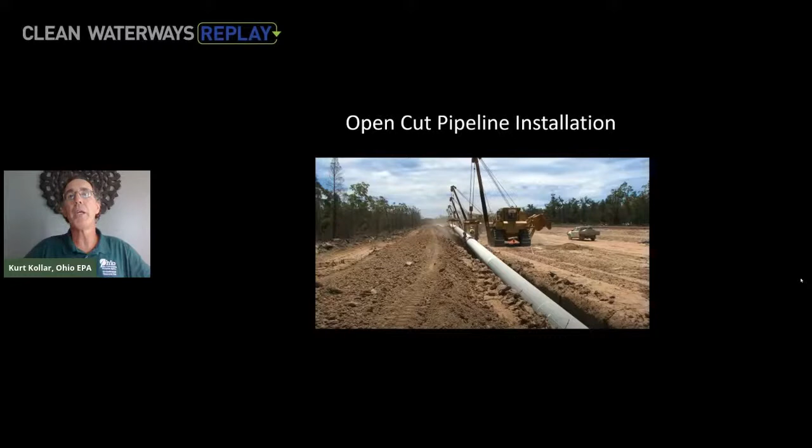What I want to talk about is pipeline installation. What you're seeing on the screen, not to bore everybody who's familiar with it, but not everybody is up to knowledge on how things go in. When they're laying pipelines, different utilities, different sizes, anywhere from sometimes a 6-inch pipeline all the way out to the big 36-inch, 42-inch, and 48-inch pipelines. Open cut is the preferred method. That is where you dig a trench, lower the pipe in, bury it, and things are good. Next.

They'll drill a pilot hole, maybe an 8-inch or 10-inch hole, and then they'll keep going back and forth, each time successively enlarging the hole using what's called a reamer bit. Now the process is fairly simple, fairly straightforward. Where the IRs come into play is during the course of cutting that borehole, drilling fluids—typically water with a bentonite slurry mixed into it—are pushed through the pipe to the cutting head, and then that material returns back to the surface where it is reclaimed and recycled. So that's how it goes. Go ahead, next slide.

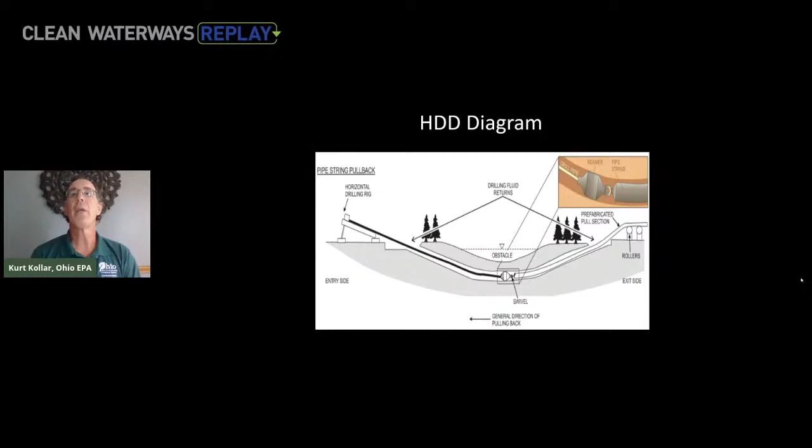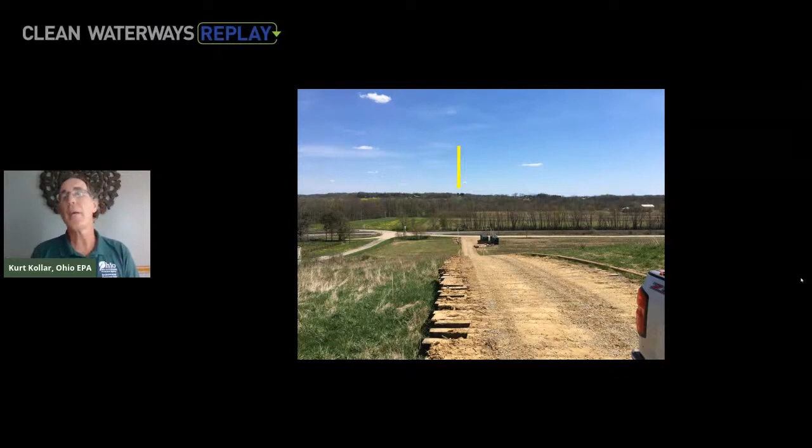When you're doing an HDD, as you can see the yellow area in this case, there's the distance. We're at the one end. The HDD in this case is traveling almost 5,000 feet to the output side, and they're avoiding 3 different obstacles in the one directional borehole. So sometimes they are expansive. Other times they just go underneath a 4-lane highway. Go ahead, next slide.

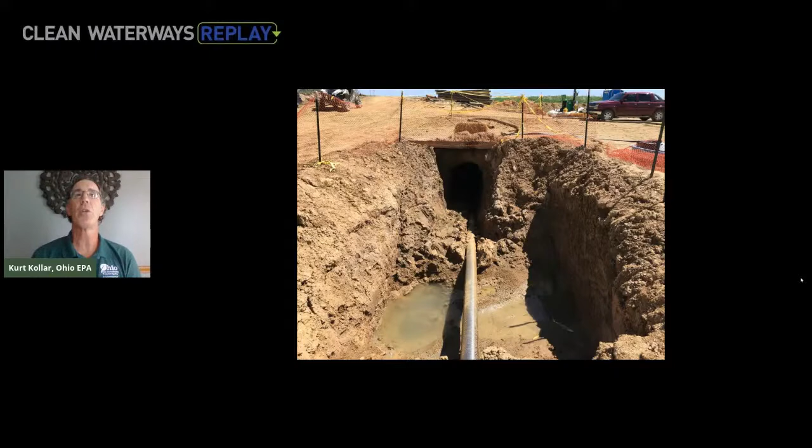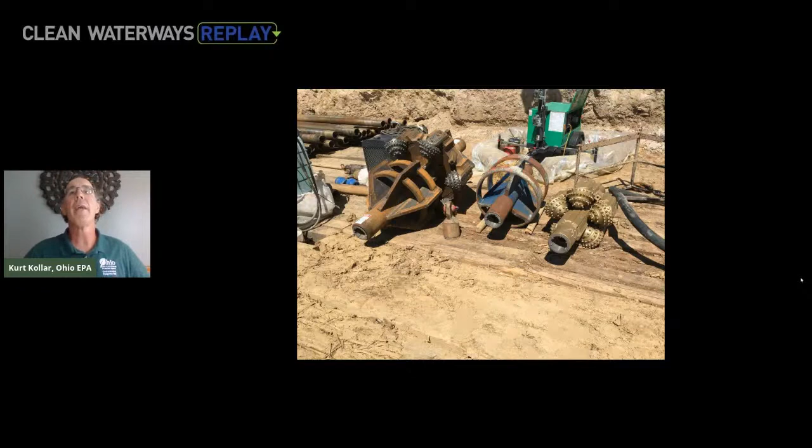These are just some examples of reamer bits, and by far these aren't the smallest ones. The one on the right is a 30-inch, all the way out to the 54, and they do get bigger than that. You're talking big equipment when you're doing this type of work.

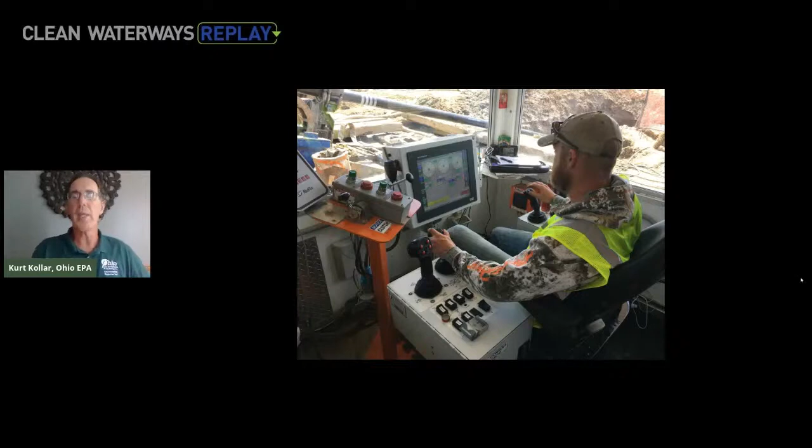This is the brains of the operation. All the work, this is the controller, simple joystick operation. They make it look easy, but it is a complicated task. When they're doing this type of work, they know exactly where they're at any time with the drill head and where they're going to be positioned in that borehole.

Now this is where you're starting to get into IRs. These are the different gauges that they're watching. But if you look at that middle gauge, the mud pressure, typically they could be operating in the range of 600 to 800 PSI when they're pushing mud through the pipe and then getting the return.

An IR, an inadvertent return, begins when that mud no longer is coming back to the open borehole. It could be being lost into formation, it could hit a void space, they could hit old mine shafts. Something goes on, but the first indicator is they will have a partial or complete loss in that mud pressure, and that is supposed to kick some of their contingency actions into place. I'll discuss that in greater detail down the road in this presentation.

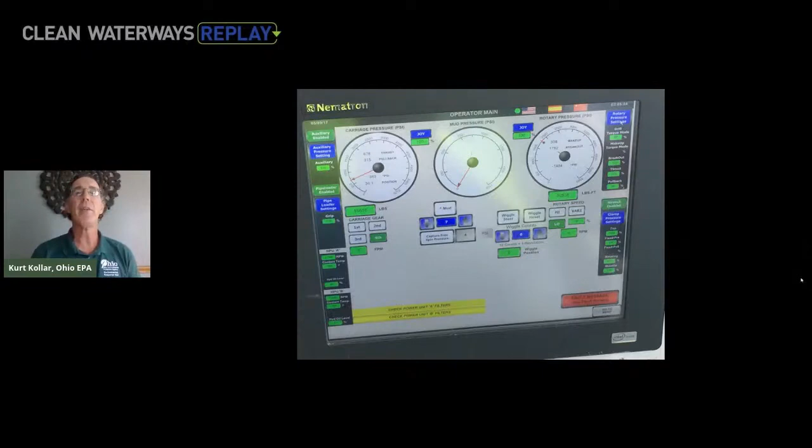One of the things they have to do is, as they're drilling the borehole, sometimes done in days, sometimes it takes weeks, even months, the pipeline that is going to be pulled through is already fabricated in place and just waiting to be connected and pulled through that borehole when it's all said and done.

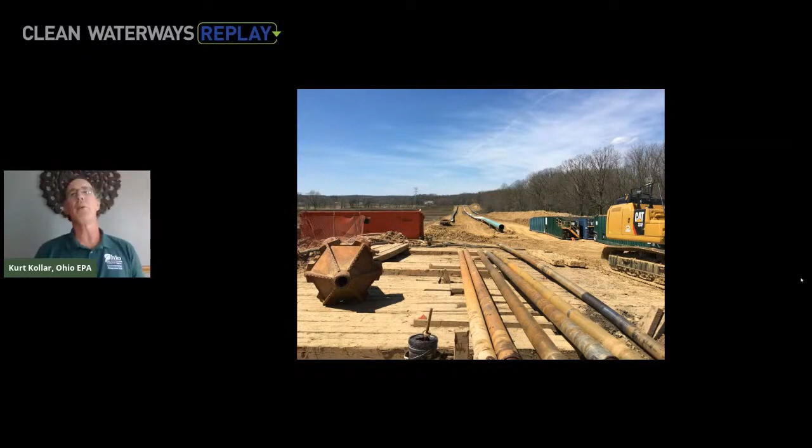So let's get into the brains, the basis of what we're here to talk about: inadvertent returns. An inadvertent return is, as I said, the mud used in the drilling process comes up somewhere where it wasn't supposed to happen.

In this picture, these are your common everyday IRs. The mud popped up in the wetland area, a small amount, 30 to 50 gallons, easily contained with hay bales, using either vac trucks or heavy duty pumps. They could collect that mud. Easily controlled, but yet still a problem, still something they didn't want to occur.

A lot of times what happens when they do get an IR, the indication at first is the loss of pressure. They start sending crews out to find out if they're having a release at some point in time. They will typically shut down the drilling operations, and that in itself gives it time. A lot of times the hole where the flow path is coming from will seal itself. If that doesn't happen, they can and will add additives to the drilling fluid to help plug it, sometimes fibers, other thickeners, just to plug the formation, whatever is causing that release, and move on.

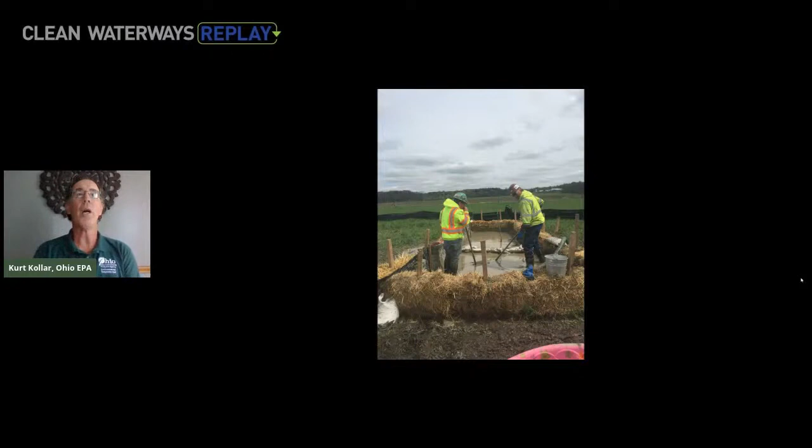Again, sometimes they can't control where the IR is going to occur. This time it's right in the creek bed itself, one of the obstacles they are trying to avoid. The indication, as you can see, is the mud coming up. The first indication might be muddy water along the bottom, and it might take a day or two before it's seen. That's where close observation is needed during this process, monitoring that mud pressure and seeing what's going on.

One of the things they found out over the course of time working with them is the breakouts tend to occur a little bit further off the center line, the drill pathway, in the beginning, and then, if it's a repeat IR on the same line, they tend to work their way in closer to the center point of the drill line. It's just something that happens as the formation fills with this mud, it's a preferential flow pathway.

What you see here is that release from the other side. Pretty simple, sandbag it out. They're prepared, dam off the creek, able to collect and control the mud. With a simple pump-around using trash pumps, the water was able to be diverted around the dam, and everything is pretty much status quo with very, very limited disruption.

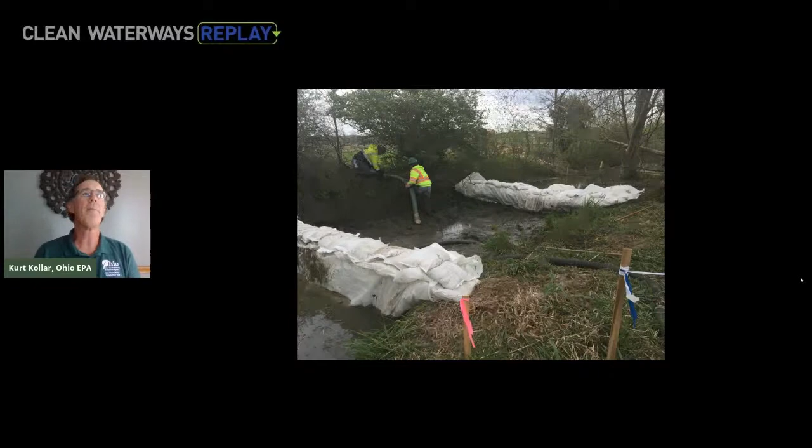Same thing here, IR occurred, hillside breakout, again very common. Go ahead and put up your hay bales, have an inventory of them on supply on hand when you're doing these types of projects, and it could be collected and contained relatively easily.

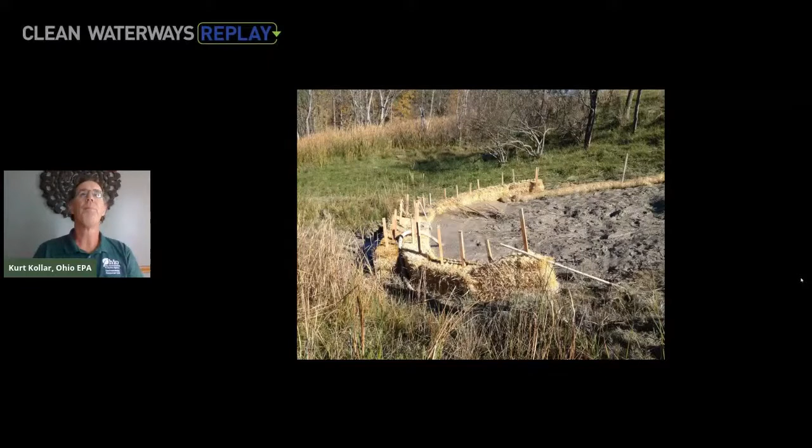Next slide. Example of one where the breakout was in a little bit more of a rapid flowing stream, again with the concept of water separation, the mud staying on the bottom, basically building an overflow dam using the hay bales and silt fence, able to control most of it. It's not always perfect, we just try to do our best to minimize the overall extent of impact to the waterway, with the anticipation this could be a short-term, small duration IR.

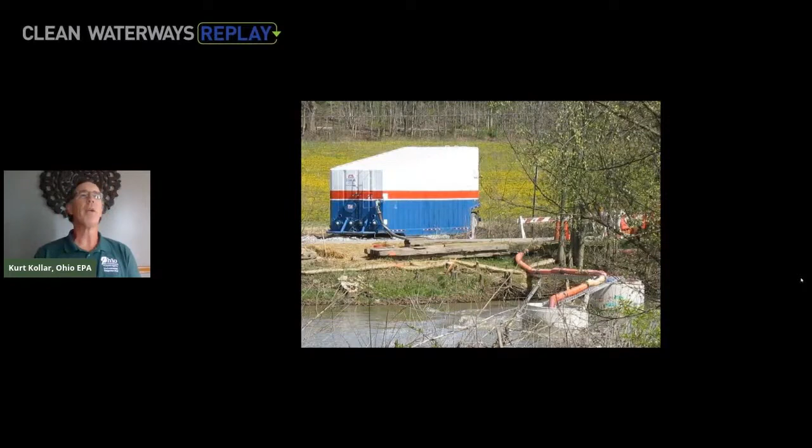This is, as I'm calling it for the presentation, the mother of inadvertent returns.

Ohio has had a tremendous growth in our natural gas production with the drilling formations. And one of the problems was, as they're putting these wells in, they didn't have the highway network to get the pipeline, the natural gas, to market. So we've seen a massive undertaking of work, different pipelines being installed across Ohio, interstate, going into other states to help transport that natural gas and other products to where the market needs them.

In this case, it was approximately a $4.2 billion, 713-mile dual, side-by-side, 42-inch natural gas pipeline being installed. And it's amazing that they transport that amount of gas, 3.25 billion cubic feet per day, from gas that came out of the wells here in Ohio.

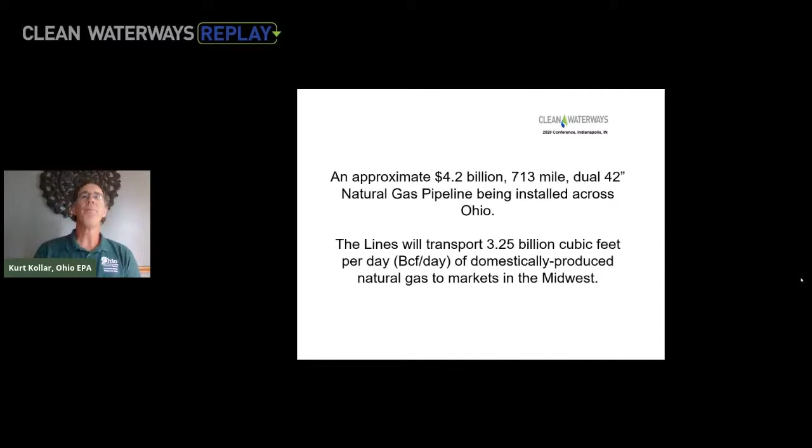Under the emergency response here in Ohio, we get notified. As I said earlier, one of us is on call 24/7, and on this particular day, I was the one on call. Calls come in from companies, fire departments, emergency management agencies, whoever would notify us that they need our help.

In this case, we got a notification from a drilling company of an inadvertent return down in the bottom of Stark County, still up here in Northeast Ohio, along the Tuscarawas River, basically telling us of an IR. At this point in time, IRs were almost a daily occurrence for us. There were 3 or 4 active pipelines going in, a lot of small-scale trunk lines, so nothing to get too worried about. Even with the initial notification, there was nothing outstanding on this one to make it any different, other than let's go out, get the vac truck, get the hay bales.

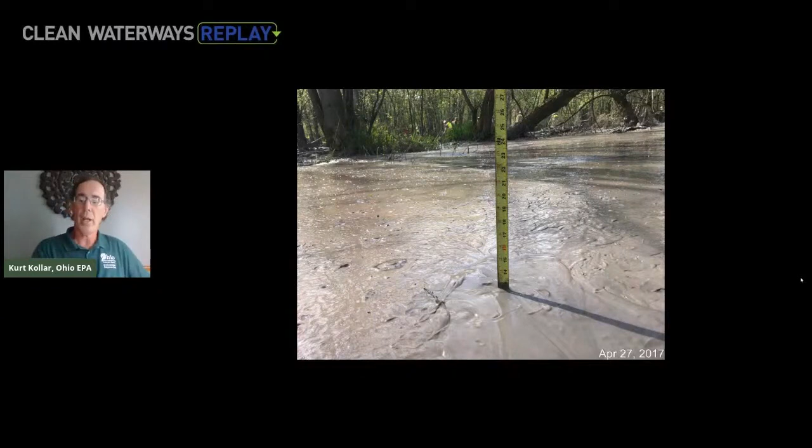When I was walking through this one, my mind became almost numb, working with it, looking at the other people. It's what are we going to even do to fix this one? And kind of to capture some of what I was seeing, the video, a picture's worth 1,000 words.

I'll be quiet for a moment and show you a video of what we were looking at when I arrived on scene. That's just mud. You remember the first picture, nice and green, the area. I was in the southeast corner. I was even in the thick of it. Now here is your mud.

And that kind of, I don't think that is what the wetland folks consider the hydric soils that they use to categorize wetlands and all that. Go ahead and go to this next slide.

Here we go. One of the things when you're looking at all that mud, now we're in an isolated area. The blue circle is the area where the IR occurred. And part of the process is it was a remote area. They were crossing from left to right.

During these processes, and I kind of touched on earlier, when an IR begins, when they lose pressure, they are supposed to implement their response procedure, contingency procedures. They're supposed to also do daily walkovers through the area, through the center line of the drill, just checking to make sure everything's going well.

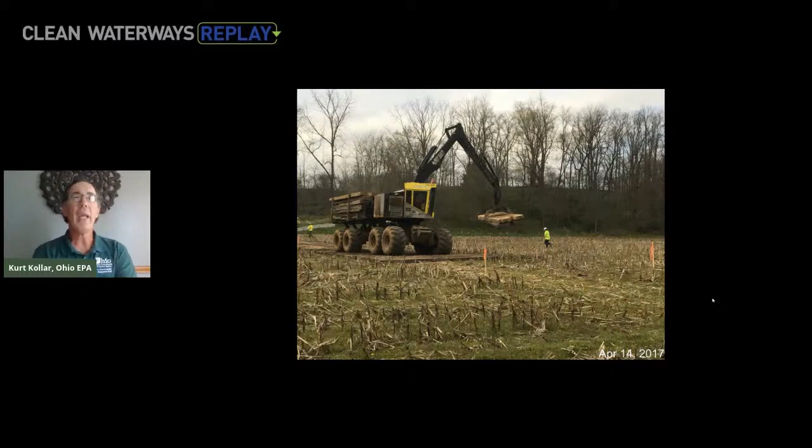And they built a road back to the area where the IR occurred so we could start with the cleanup. That took a couple days, even planning and construction. They knew they were in for the long haul.

Part of this process and the anticipation of this was they still had another whole pipeline to do, plus they had to continue this one. They were only about halfway through the borehole. They had to take a borehole for this one out to 60 inches. So they had a couple more passes and a lot of mud to push through the hole yet.

So they built a road with the anticipation of being in it for the long haul.

Now we were dealing with mud. One of the things we did, it was heavy labor, and my hat's off to the crews that worked. There was nothing easy about this cleanup, from moving sandbags and wattles to dragging hoses and vacs and all that, just pushing mud to pickup points.

One of the things we did right away is brought in emergency response, which has the ability to bring in subject matter experts from our other divisions to help us and provide guidance on what we need to do next - anything from waste management to air pollution to our division of surface water, our wetland biologists and specialists. We also notified U.S. Fish and Wildlife Service so they could have a say in this matter.

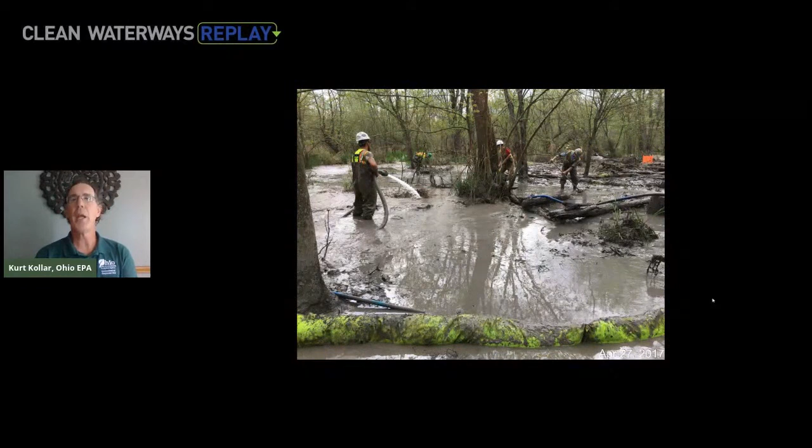Then, using vac trucks and high volume hydraulic pump heads, we moved the mud to collection points. The nice thing was the facility was able to reclaim a lot of this material, the water and mud needed for the HDD to continue. It was brought back up to the drill rig, put through the reclaimer to get out the solids, and the majority of it was reused. So we almost had a closed loop system going.

Again, my hat's off, there was nothing fun about it. There were slip, trip, and fall hazards left and right, and mosquitoes that wanted to carry you away - too bad they didn't take any of the mud with them. It was actually a joke among the crews: if you did a face plant in the mud, you had to buy your crew pizza dinner that night. Believe me, there were many pizzas bought for the different crews, and I won't admit to falling once or twice myself.

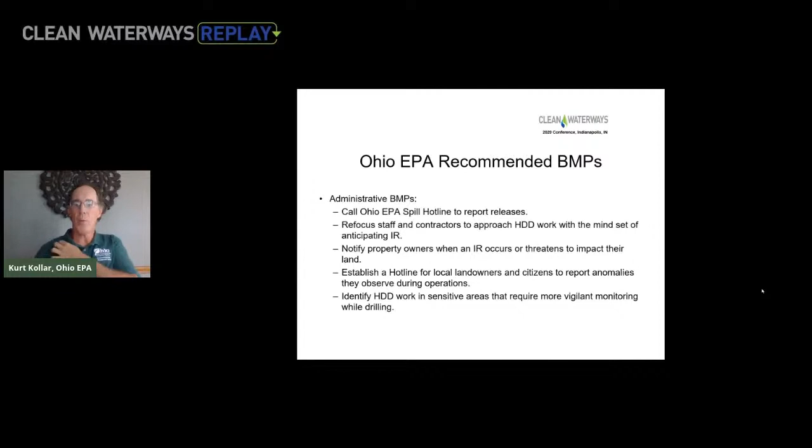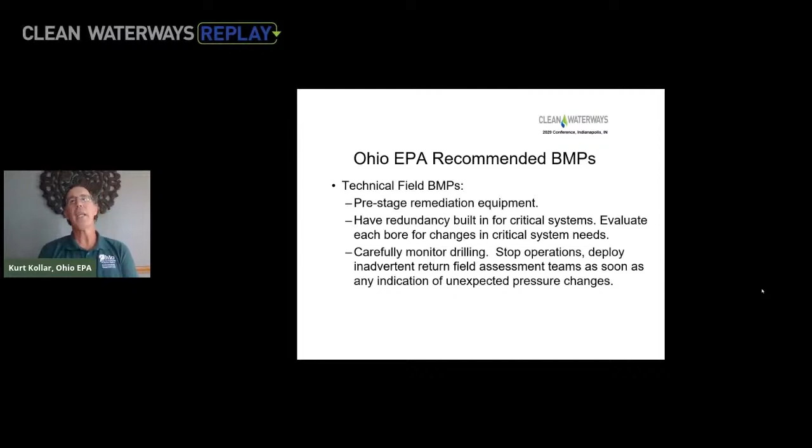The biggest thing is careful monitoring of the drilling, recognizing that time is money, yes, but if things happen and go bad, this cleanup was costly. It slowed down their operation.

The other thing is, and the company even talked on this, the distance underneath from below grade is calculated out well ahead of time. A simple shift of a foot or two is nothing, but if a 10-foot or more shift happens, a lot of engineering has to go into the angle of pitch.

And all that to get the pipeline to bend and flex in the borehole and come out at the right depth. On this one, they knew right away with the second one, were they going to relocate or go deeper? In the end, they went deeper by a significant amount without any issue. There wasn't one IR reported whatsoever during the installation of that second 42-inch pipeline.

So, I mean, mistakes happen. Is it a soft bog? What are the soil depths? They do sometimes do well borings to get that formation information, but sometimes those borings are miles apart, 5, 6, 10 miles.

The other thing we found out, a lot of these companies were even out of the West, Texas and all. Our geology, our winters are much different than what they faced in Texas. That was one of the things a lot of the companies commented on, is they weren't expecting some of the features and some of the weather conditions they had up here in good old beautiful sunny Ohio.

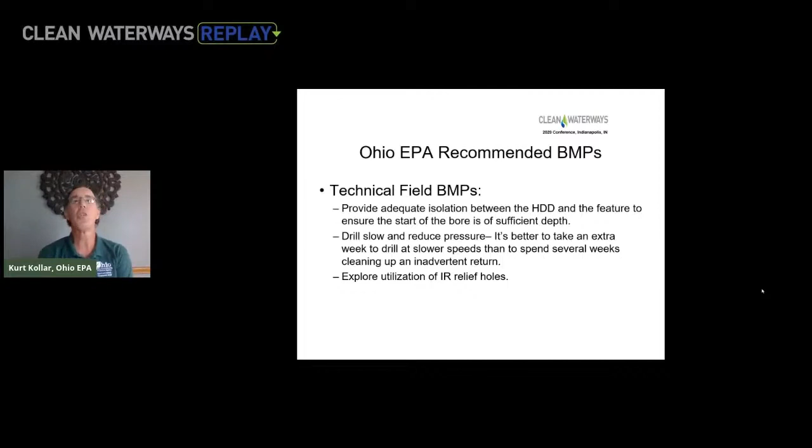It was evaluated whether or not they go ahead and drill a borehole from the surface down on top of the HDD, case it off, and give the mud a path to go. After some serious evaluation, they opted not to do that, but that is sometimes a very effective operation. Now you basically have a point source discharge for your drilling mud to come out of. So go ahead, next slide.

It was amazing too, and this isn't an isolated case. When you're talking to the crew in the field, they really don't even know sometimes what the identified resources they were targeting were. It's just another wetland or just another creek.

Yes, but they didn't understand the expanse of it. They didn't know wetlands and waters of the state, what those terms mean. Those were the people, the environmental folks back at corporate, who designed the plans to do, but the boots in the field just knew to do their job. So sometimes communicating that information and making sure the guys out in the field are well aware of the resources they're trying to protect by doing the HDD.

The other thing we said is increase the frequency of the assessment team. On that one we just talked about, there were a lot of fingers being pointed along the way. And human nature is path of least resistance.

In this case, there were a couple of things built into it. The companies lease a right of way that, let's just say for discussion purposes, it's 100-foot wide, with the center line being where the borehole is. That lease is very legally restrictive, and as they do their assessments, they can't go out of that right of way.

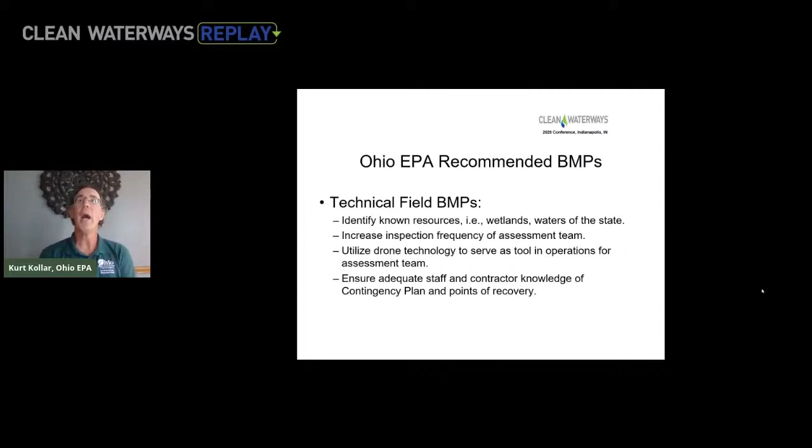The other thing is, just like a stormwater pollution prevention plan, the plan is only as good as the people who know it. It shouldn't be printed off, put on a clipboard, and thrown on a shelf. The staff should know what to do, know where the staged equipment is, and have training so that if it happens, they're ready to kick it in and practice it, almost like a fire drill, especially on large scale projects.

The other thing we found, coming more from our surface water folks and less from the emergency response phase, is that there were very specific stormwater management issues, with timely reclamation and stabilization needed to prevent erosion into the waterways.

Can areas be dewatered? Potentially, but you don't want to dewater a wetland. We found on some of the open cuts that the slope breaks really weren't put in, or if they were, they were put in improperly and weren't maintained. Sediment fabric quickly fills up with runoff, becoming basically useless and actually exacerbating the conditions.

Effective perimeter controls meant improperly put up sediment fence. In some cases you're putting up miles of sediment fence, and it's a lot easier to just pound it into the ground and lay it on the surface without really trenching it in. These were all things found to be problems after the fact, and a lot of these companies, when we worked with them, committed to process improvements so they didn't have this type of incident again. Word quickly spread throughout the industry about what was going on down in Stark County, and it was highly publicized in local media, creating negative publicity for a company that really didn't want that.

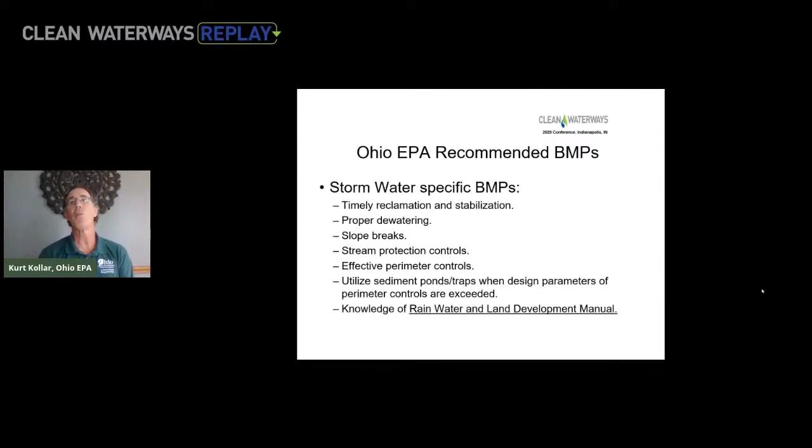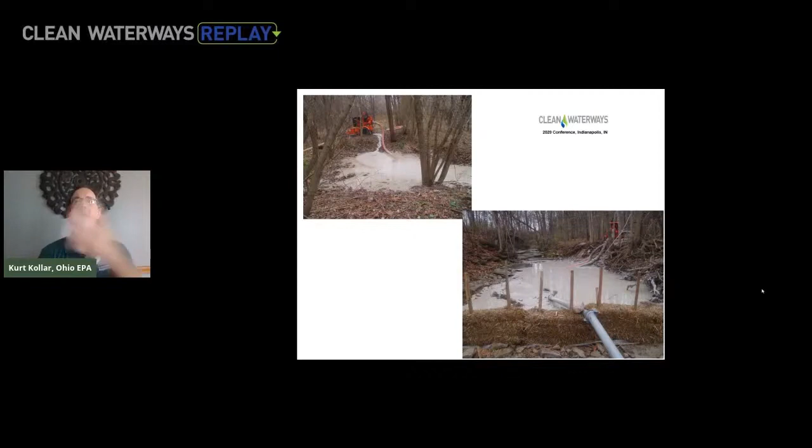In the end, with proper management, IRs are going to happen. It's not a matter of if, it's a matter of when and where. Being properly prepared, having the equipment on hand—in this case the large capacity tow-behind pumps—keeps everything controlled and simple, minimizing the effect, your out-of-pocket costs, and delays in your project. So again, pre-planning is critical, because failing to prepare is preparing to fail.

They were supposed to install dead trees and branches to help create habitat. There is very low diversity of flora compared to the immediately adjacent unimpacted areas of the wetland. Most of the cleanup area is dominated by disturbance-tolerant and invasive species that weren't there before. Some of the deeper pools, where the mud collected at its worst, still have a significant layer of what appeared to be clay on top of the wetland soil. So there's still work to be done.

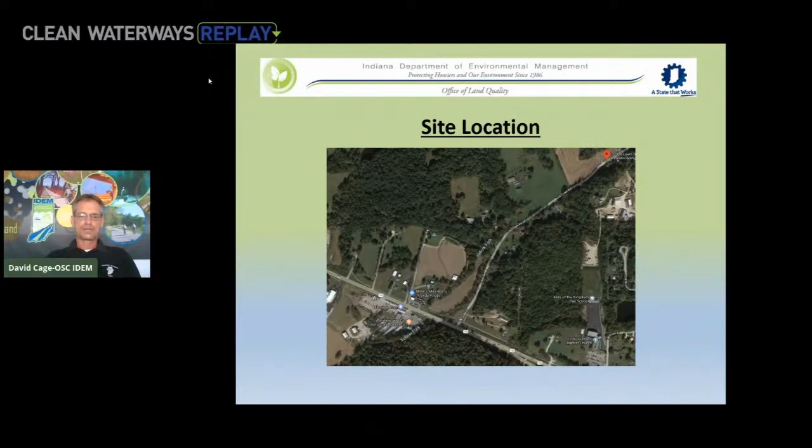What we had when we first arrived, we had several people on scene: the Department of Natural Resources, Emergency Management Agency, Health Department, Fire Department, Police Department, two environmental contractors, lots of equipment already in place, as well as the owners.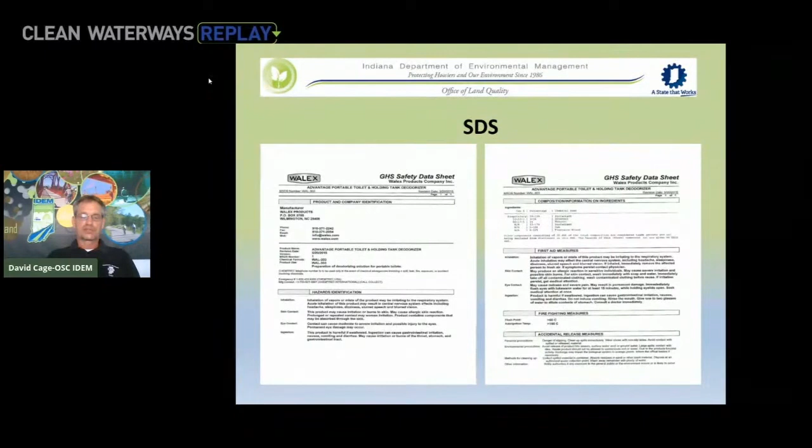This slide is the material that they actually spilled, and what had taken place is they had actually rinsed out one of their tanks, and it went down the drain. This is just the SDS sheet on the product that was released, and in the bottom right-hand corner there, it shows that it is clearly a biocide and will affect the aquatics if it enters surface water. The problem we run into with this material is it's normally discharged into a wastewater treatment plant, so they have to be very careful in accepting this waste on a regular day—that's in a much more dilute form.

This is the bulk container. They come in 250 gallon bulk containers. This is just one of them that was full, but when there's a little bit of residual in there, that's what the employee rinsed out.

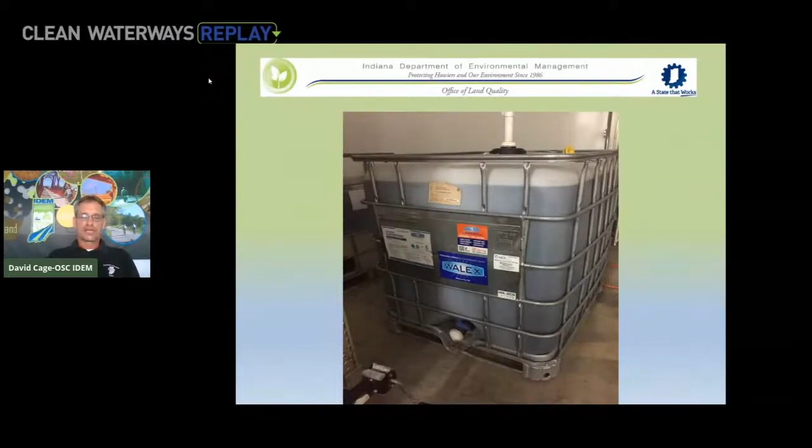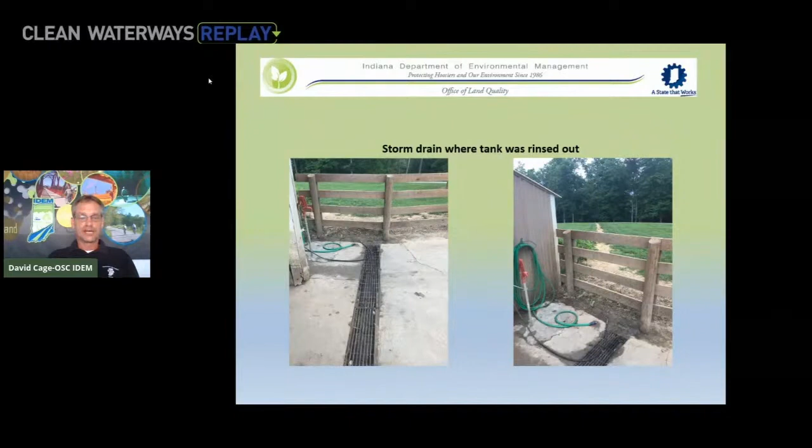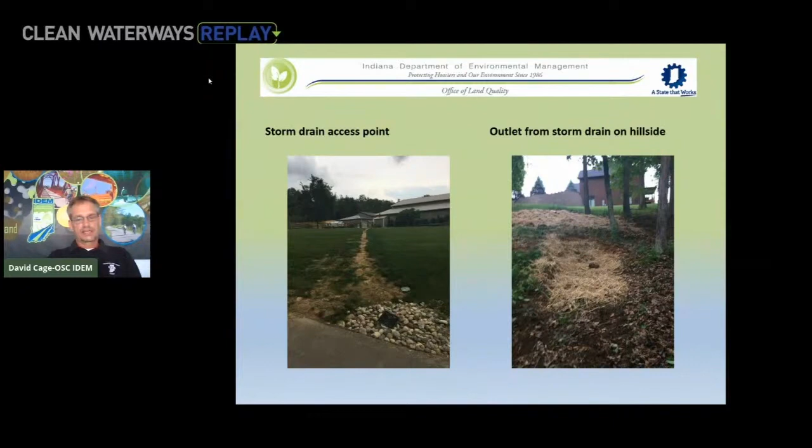This is looking back. This was recently installed—we don't know how recently, but it was recently installed. By the time I got there, the right picture shows where they had dug a hole to try and prevent any more material from entering the stream. From the picture on the right, it drops down fairly significantly down the side of this, essentially a cliff, and enters Yellow Fork Creek.

So it is very potent. They often use it in a dilute form, but in this particular case, it was full strength, other than the rinse water the gentleman was using to rinse out this tank.

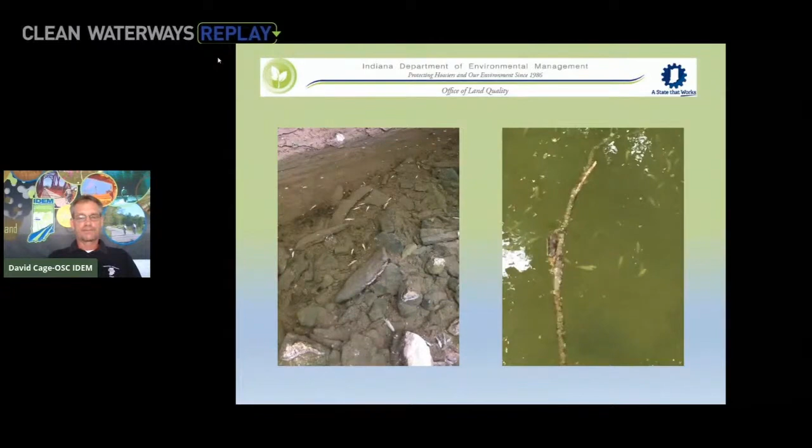Next, and here is the material itself, so a little bit goes quite a long way. We noticed a lot of obviously dead fish in this part of the stream.

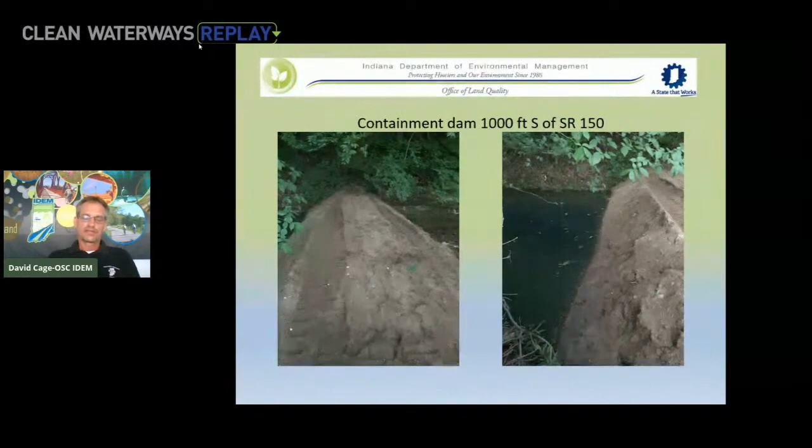The next morning we did our assessment. We had no dead fish at this area, and I made a decision that we're not going to recover any more water at this point. We still had a blue tinge, but these are some of the decisions we have to make on deciding whether or not to remove the dam or remove more water. We made the decision to go ahead and remove the dam at that point.

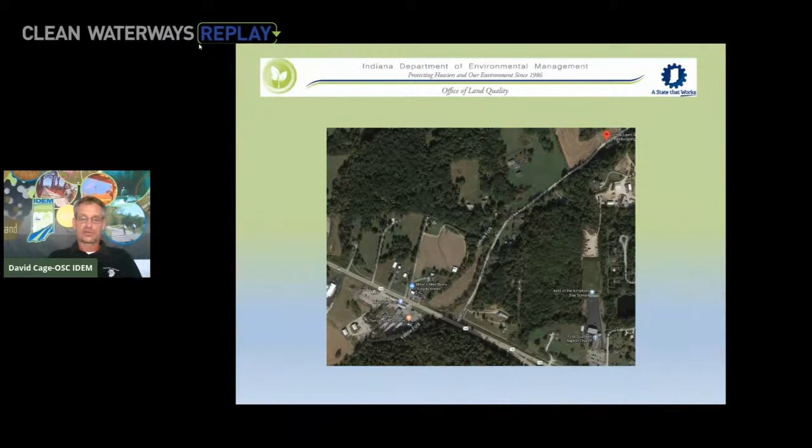This is the last stage of what we needed to do: break the dam and restore the stream flow. From there, we waited a couple hours, went downstream to check and make sure we didn't have any issues going on that we weren't aware of. We didn't see any abnormal effects downstream, and that was the end of the response.

So what we ended up doing is obviously they had to answer some questions. The Department of Natural Resources did their fish kill count, which in this case, since we had so many fish, they have a formula to determine how many fish actually perished, and they go over the types. They had an enforcement action that resulted in a fine from both the Department of Natural Resources as well as my agency.

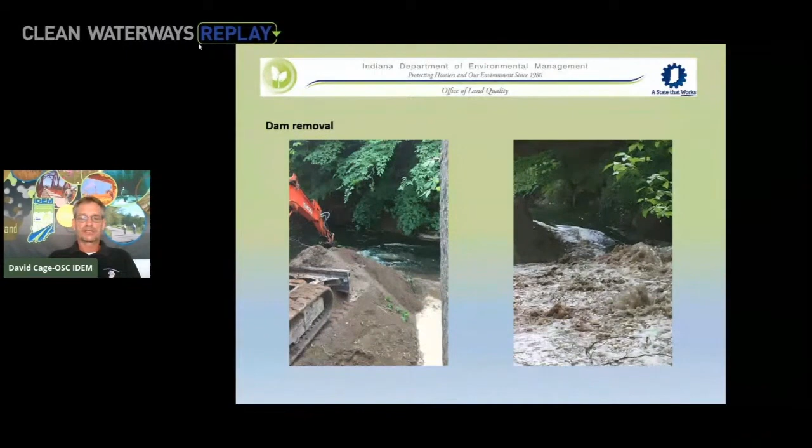So really quickly, in Indianapolis we have Citizens Energy Group, and Citizens Energy Group runs our wastewater treatment plant as well as our drinking water system. So what they're tasked with is obviously the collection system as well as the treatment plants, the drinking water plants, and anybody that discharges into those systems.

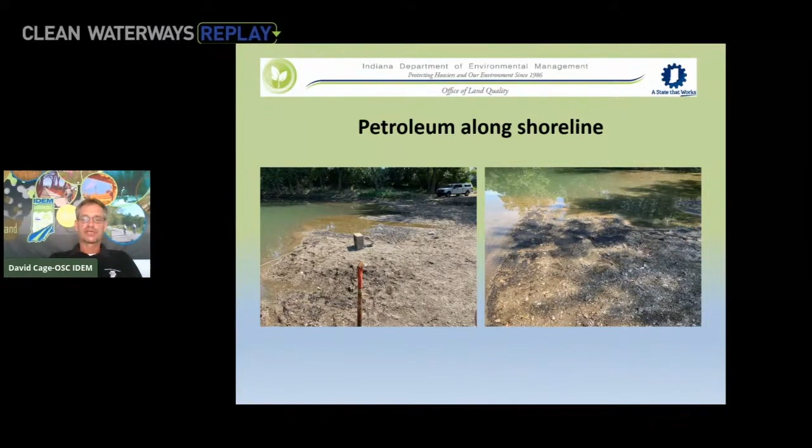So we started doing some research, working our way back up the bank to figure out where this was coming from. I came across this structure, which happens to be the combined sewer overflow 117. Then we looked down at the spillway, and this is what we saw. Obviously there was a large event that happened. It came out of the combined sewer system into the river, and that's all we knew at the time.

So this is a few other shots of the same area, and it's concerning. One of the concerns in this picture is you can see a line on the left side that clearly indicates this wasn't the first time this has happened, or there's been another discharge, because you've got clean rock and then that smudge line on the left-hand side.

Our protocol here is Citizens Energy. We contacted them and said, hey, we've got an issue going on the White River, this is our location, and of course they send their folks out to begin assessing what's going on with us. What I want to make abundantly clear is Citizens Energy didn't put it in the system, and they're at the mercy of the industrial folks and anybody that discharges to Indianapolis.

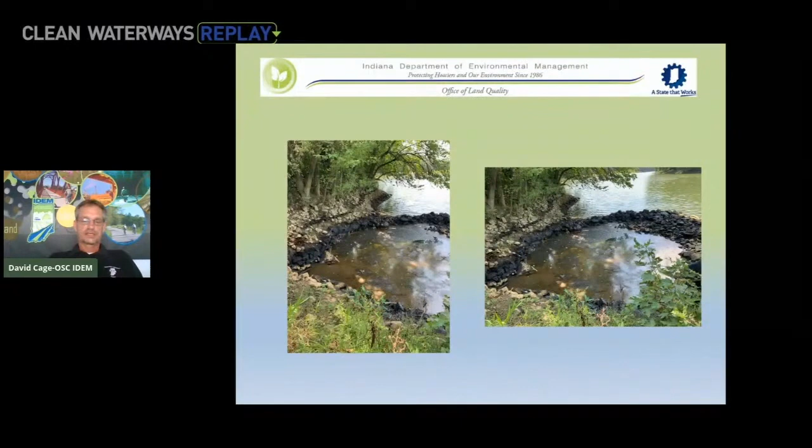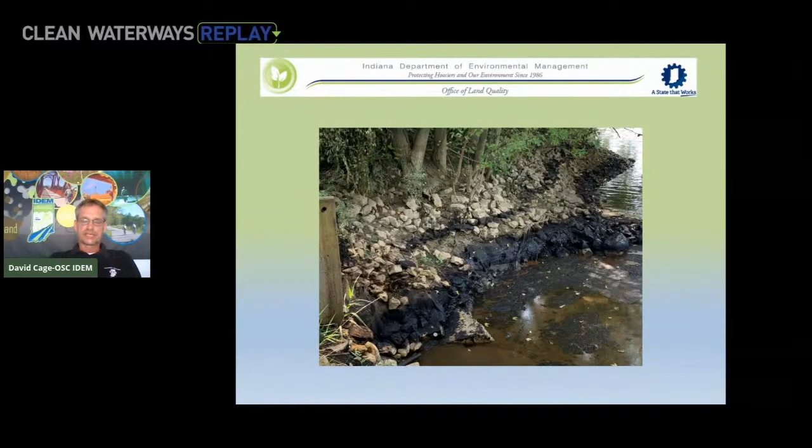Another shot. It was very thick oil. The splash pool was obviously full of oil, as you can see in the bottom right corner. Everything was covered in a thick layer of petroleum-based something—you couldn't tell if it was diesel, motor oil, it seemed to be a mix of the above. But you can clearly see here the line where it had happened before, and this gets a little bit worse as we move through the slides.

This is a shot from the top where they have the combined sewer overflow structure. I'm going to get into a little bit of what Citizens has been doing, the initiative to eliminate combined sewer overflows in the county, and of course we've got that going in other large cities as well as nationwide to eliminate sewage from entering streams and rivers.

So here we have the initial response. We had Citizens hire a company to come in. We've got a vac truck ready to go. We've got a game plan as to how we're going to address what's in the creek and prevent any more from moving downstream.

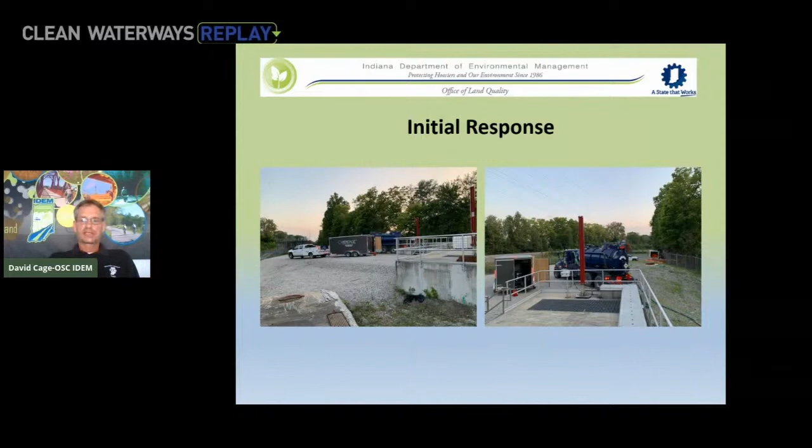So the initial stabilization was, as you see, we've got absorbent booms trying to keep any floatables from leaving this area, and then we went ahead and reinforced that with a skirt boom. That orange boom behind has a 12-inch skirt that goes down into the water body to try and prevent anything from rolling underneath it. That was the first step of this process to clean it up.

So this is where it gets a little more concerning. That initial picture I showed you with the sandbar in front of Pleasant Run—there were tar balls scattered all over that little sandbar on both sides, upstream and downstream. But that's where we first started. One of the things we did during day 2 was I had some other folks from my department, emergency response guys, as well as folks from Citizens Energy, and we did an initial shoreline assessment.

So we sent those folks downstream on both sides to see how far we were going to have to respond, and obviously remove any contamination that we found. Fortunately, it did not go much beyond that little sandbar at the end of Pleasant Run. So this was manual labor, actually picking up tar balls all around that sandy area and physically removing by hand all the tar and petroleum that they could find.

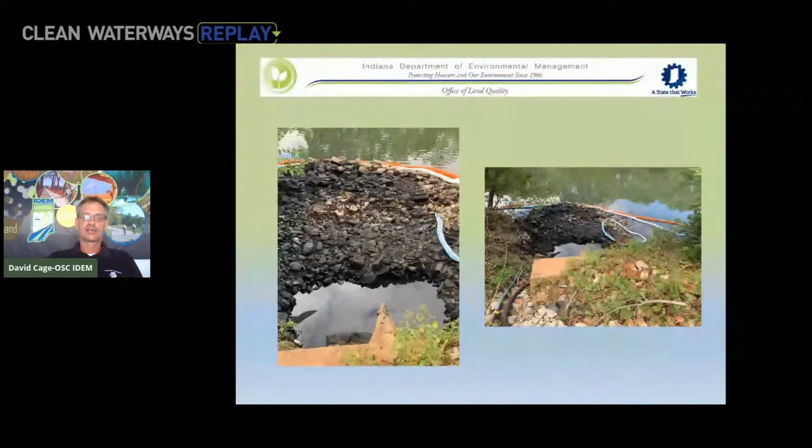And these pictures just show the extent of how much oil there was—it wasn't just because we drained the pool and got the bathtub effect. This was covered on the rocks long before the water was removed.

So this is looking back. If you remember the first slide, my truck was sitting on the bank, and we were on that little sandbar at the end of Pleasant Run. This is actually looking back along the left descending bank, towards the combined sewer overflow. So when we first got there, you start trekking down along the side, seeing until you find where it's coming from.

That's just a shot of that area. We've also got, I believe in this area, some booms set up just to prevent anything from floating out into the river and getting away from us.

So everything from Pleasant Run back up to the CSO, we ended up putting up hard boom on the outside, and then absorbent boom on the inside, just to make sure that during our response activities we didn't release any oil, at least floatables, into the water body and have to chase it downstream.

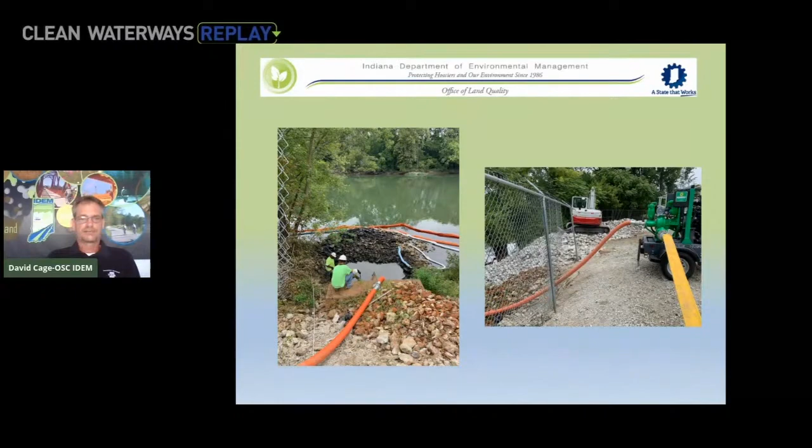And this is that piece of equipment, the long arm excavator. Once we built the pad out, he was able to reach down, grab all the contaminated stone, spin around, and put that in roll-off boxes.

The other option we were talking about was possibly power washing and recovering all the rinsate, or manually removing those stones. That was just too big of a task.

So I broke this up into 3 areas. We had the main area right around the combined sewer, the second area that went from the combined sewer down to Pleasant Run, and then Pleasant Run and that sandbar was our third area.

By the time we were working on this, we had pretty much completed the cleanup efforts on the shoreline at the sandbar, which was about a week later, but we still had the work to do at this spot, and also from here downstream to Pleasant Run.

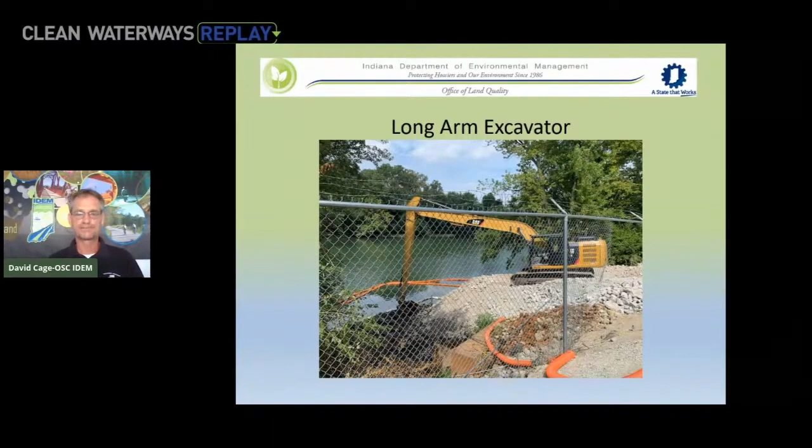This is just another shot. He would dip down, grab all those stones, and spin around to put them in. I think he was putting them into a skid steer, and then that skid steer would come out here and put it into lined roll-off boxes.

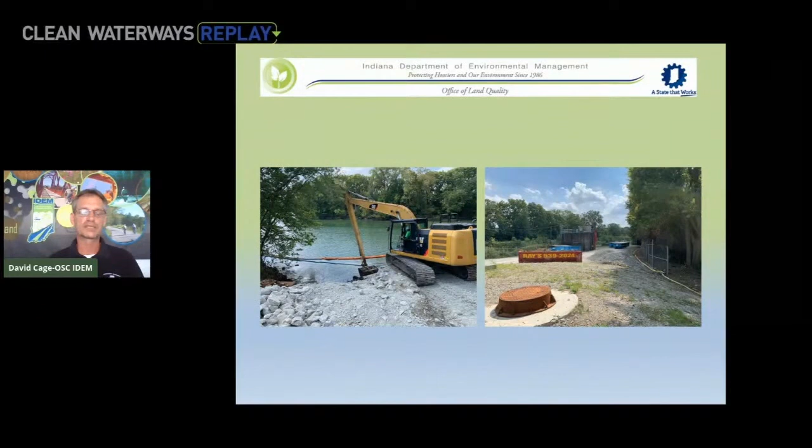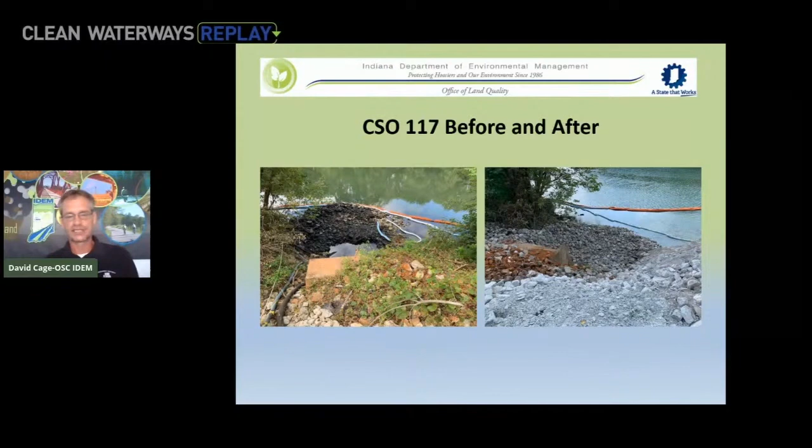So that is the splash pool. We still have our containment in place just in case, so that's going to be the last thing that we would remove.

This is working from that last slide downstream to the sandbar. One of the issues we ran into was the trees - this was heavily overgrown. You could barely get up there when we first started.

So one thought was to take out all the trees, and then we decided no, we don't take out all the trees, you can take out some trees. So this is what we were left with.

We had that medium excavator walk down through this area, mechanically scoop up everything, and then transfer that to our roll-off boxes and dispose of that accordingly.

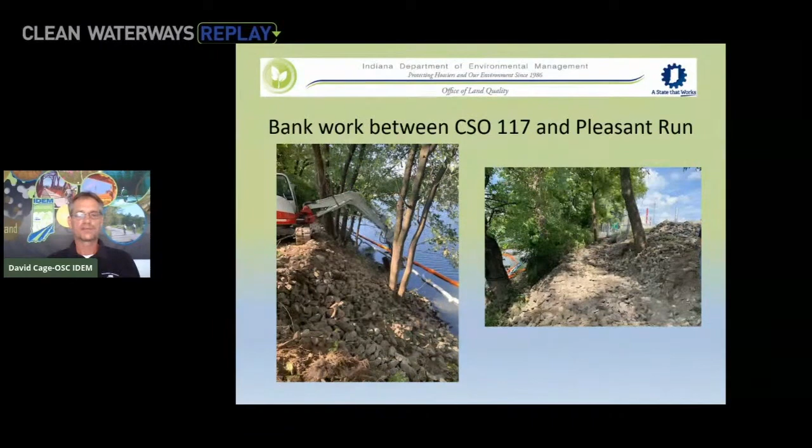This is a clear shot of where we started at CSO 117, looking downstream towards Pleasant Run. When all this work was taking place, we were making sure that nothing left those rocks, or that we didn't disturb anything that would push oil into the river and have to go chase it later.

This is the before and after. On the right-hand side you can see those lines in the tree, and on the left-hand side you can see it from a slightly different perspective. We were fairly successful in removing all that contamination down through there. It wasn't 100%, but we were restricted by the steepness of the bank, and we didn't want to cause more damage cleaning everything up.

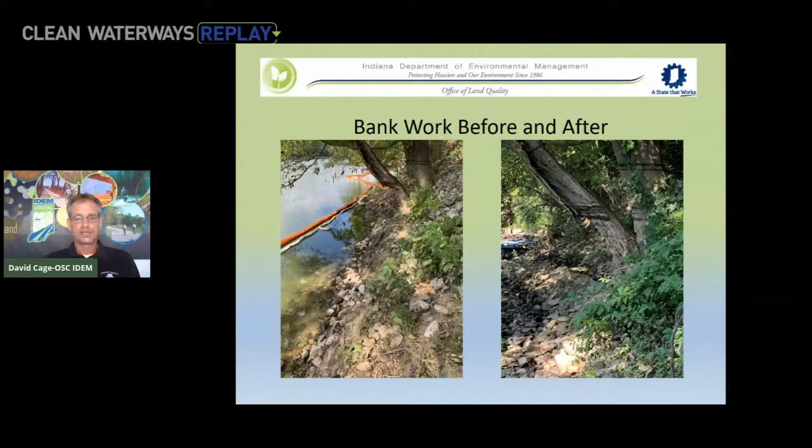And Jody, back to you. Thanks, David, that was a great presentation, thanks for sharing your experience with us. I didn't realize that Indianapolis had such an intricate stormwater management system - the Deep Rock Tunnel, very interesting. I'd like to see that.